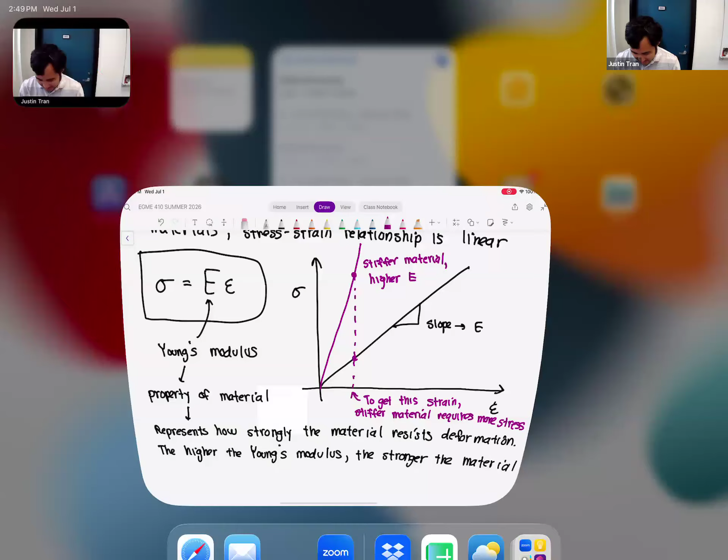I figure I'm not here just for an easy grade. I'm here to learn it, so I'm still going through it, not just copying screenshots and retyping them. No, I know, I know.

Kind of the unfortunate thing is that I teach all the FEA courses here, so there's a lot of overlap between them, mostly just because we don't enforce the prerequisites. Some people come in having taken 410, others haven't, some have taken 540 or 541, so it makes planning a kind of a nightmare.

But actually, this upcoming year, I think we're going to start offering 410 more often now. We're offering it this summer, and also in the fall and the spring. So I think we can actually start to enforce that prerequisite, and then I can do some more interesting stuff at the 500 level courses. But unfortunately, that would be next year, not this year.

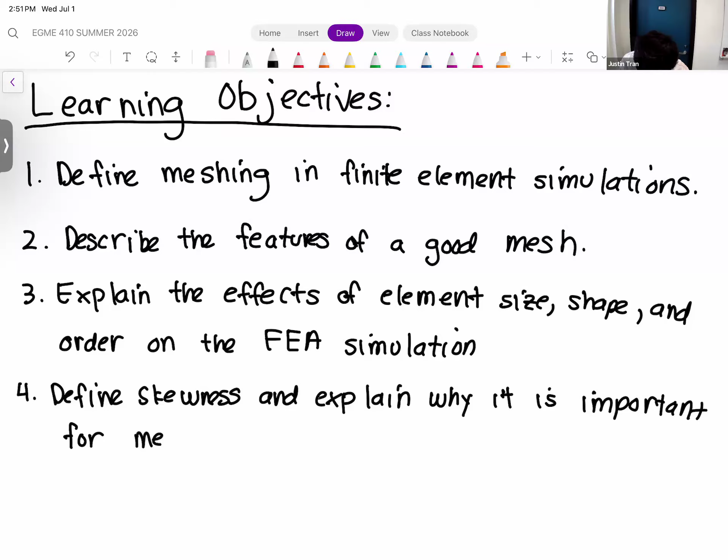Well, you know, I think if there's someone on staff who would know about viscoelastic materials, it would be Dr. Shinyi Wang, because her expertise is actually in materials. She had a student who just defended their thesis on the propagation of microfractures in materials. That's a different area of material science, but I would ask her, and I'd also ask Dr. Su, since they're both in materials.

Okay, yeah, thank you. Good to know.

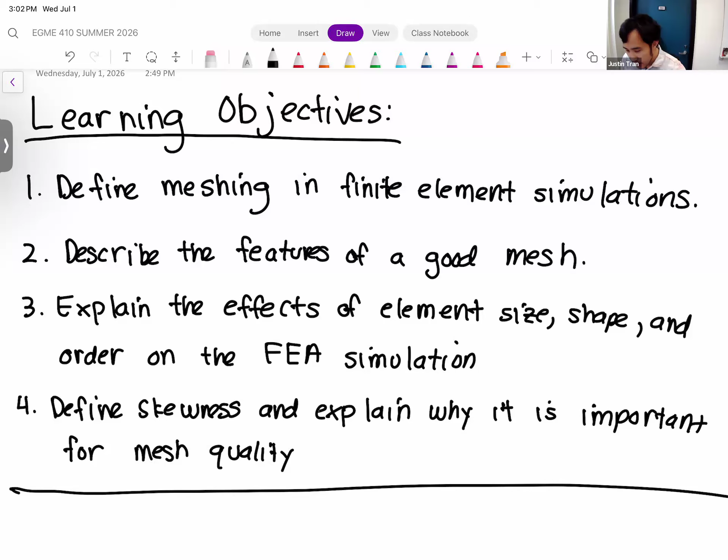Okay, let's go ahead and get started. Today's lecture is going to be about meshing, and we're going to go over what I call meshing basics.

Today is not going to be the first or last time we talk about meshing. Like I mentioned yesterday, meshing is probably the most unique portion of finite element analysis - probably the portion you haven't thought about in your previous classes. Tomorrow we're going to go over boundary conditions and material properties, which for the most part you've seen in different forms in your other classes. So meshing, I want to spend quite a bit of time on in this class.

Okay, so first let's define meshing one more time. When we say we want to mesh our geometry, we're basically looking to break up our geometry into a bunch of tiny, simpler shapes.

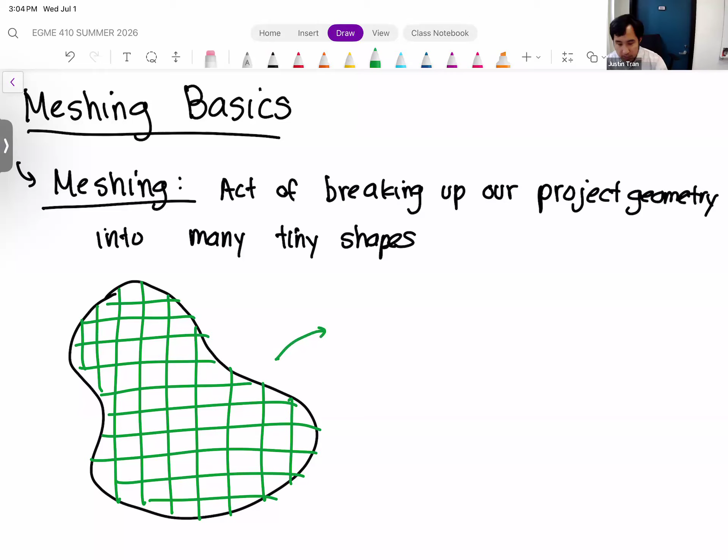What you're going to see, and you'll see this when we do our activity later, is that it literally looks like you take your geometry and superimpose some graph paper on top of it. So visually, you'll start with maybe a geometry that looks like this - this is your starting arbitrary geometry, it looks like a potato here. When you mesh it, we're going to take this and essentially put a grid on top, so it's going to look something like this. The whole idea is that instead of analyzing one complex geometry where it's very hard to solve our equations on...

...because that complex geometry can have any number of different sizes, any number of different curvatures, different edges, different surfaces. Instead, by meshing, we're solving our equation on lots of simpler geometries with a known shape - that's the key.

So one thing we're going to talk about today is that when you are creating your mesh, you have to make a decision in terms of what element shape you want to use. Your choices are not many, but they are consequential. For the activity today, we're going to do a two-dimensional simulation, so you can either choose a triangle or a rectangle, which doesn't sound too exciting, but it does make a difference. There are other features of the mesh that are going to make an impact on your simulation results as well.

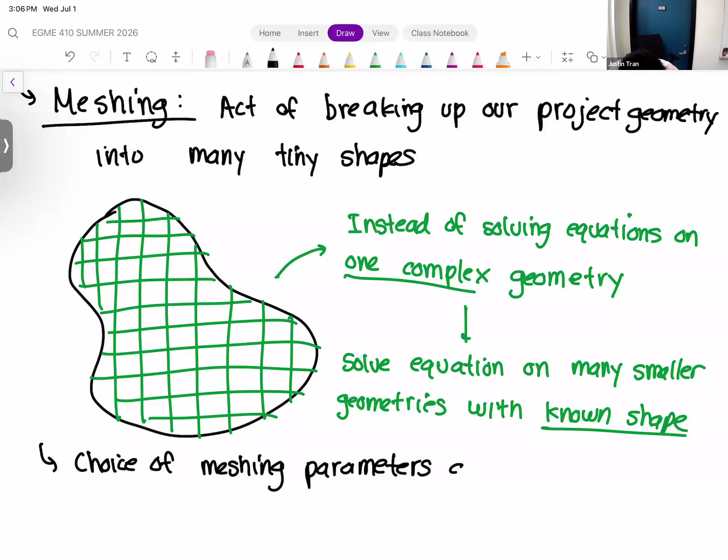So the mesh is one thing where if you're not careful, it can kind of get away from you a little bit, because if you're using ANSYS just as a new user, ANSYS provides a way for you to generate a simple mesh. So you can just use all the default settings within ANSYS and generate a mesh, and it will work. You'll be able to get a result from it, but more times than not, it's not going to be a result that's reliable. We'll talk about why that is throughout today.

The nice thing about these longer class sessions in the summer is that you'll actually see that applied right away. So we'll talk about the mesh first half today, and second half we'll do an activity and get to see the mesh in action, in terms of what the different settings actually do.

So the plan for the first half today is we're going to go over just the very basic meshing settings. We'll talk about what they do to the mesh, and then what they ultimately do to your simulation results at the end. Any questions on this so far?

Okay, good. So first, before we get into the really nitty gritty, let's talk about just what makes a good mesh in general.

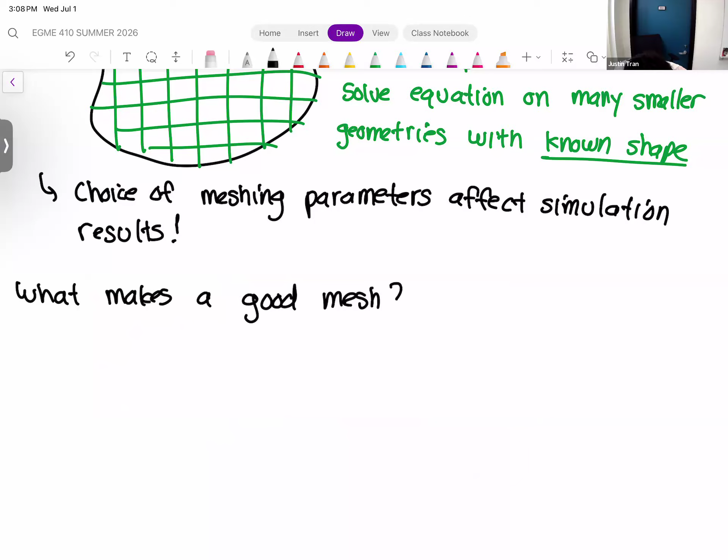Because you can certainly make a bad mesh in finite elements, and it's important—one important skill for you to know is to be able to identify what's a good mesh and a bad mesh. Let me just state it plainly first, and then we'll dive more into what this statement actually means. A good mesh is one that gets you an accurate and reliable solution in the least amount of cost.

So I've kind of underlined the two dominant factors that will go into your mesh, right? The first factor is accuracy, and the second factor is cost. And you're going to see that these two are often counterbalanced with each other. Usually if you want more accuracy, it's going to cost more. But if cost is a big concern, then you might have to sacrifice some accuracy as well.

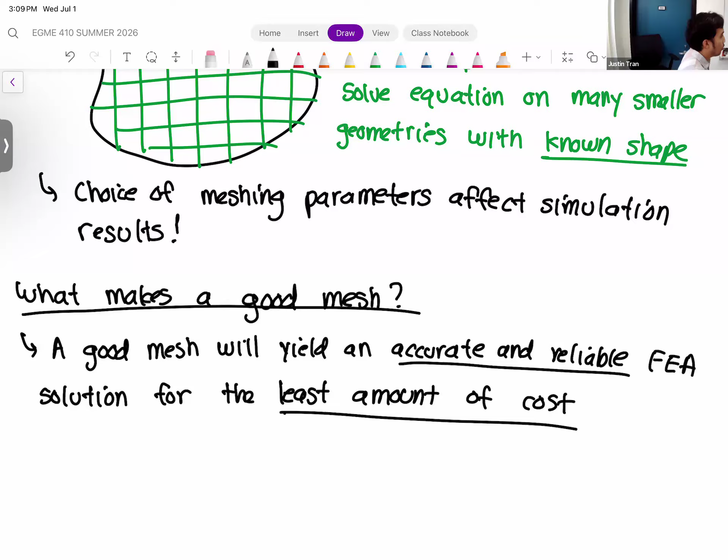There is some nuance, of course—you can change the size, you can change the shape of the elements, you can change the order of the elements. So there are ways to generate more accuracy without necessarily increasing the cost. But this is the main trade-off that you have to think about when you are creating your finite element mesh.

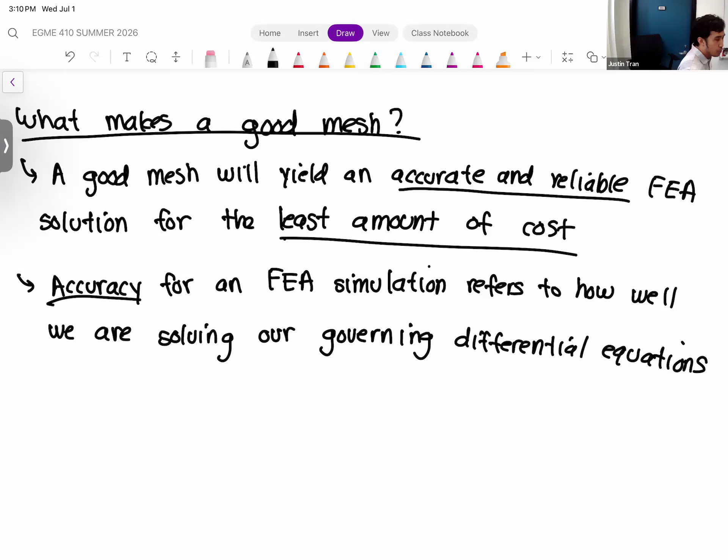Okay, so let's go through each of these one by one. Let's talk accuracy first. Accuracy refers to how well we are solving our governing differential equations. Remember we talked yesterday about FEA being just a method for solving these, oftentimes partial differential equations that govern our physical behavior. So accuracy refers to how well we are solving these.

So what do I mean by that? When we run an FEA simulation—one thing I neglected to mention yesterday, and I realized that right after the lecture ended, is that FEA doesn't necessarily find an exact solution to our governing equations. FEA is, at its core, an approximation technique.

We're not solving for exact solutions, and actually, depending on how we make the mesh, depends on how close we are going to be to that solution. The main factor for a mesh that determines accuracy is how many elements, or more specifically, the size of the elements in our mesh.

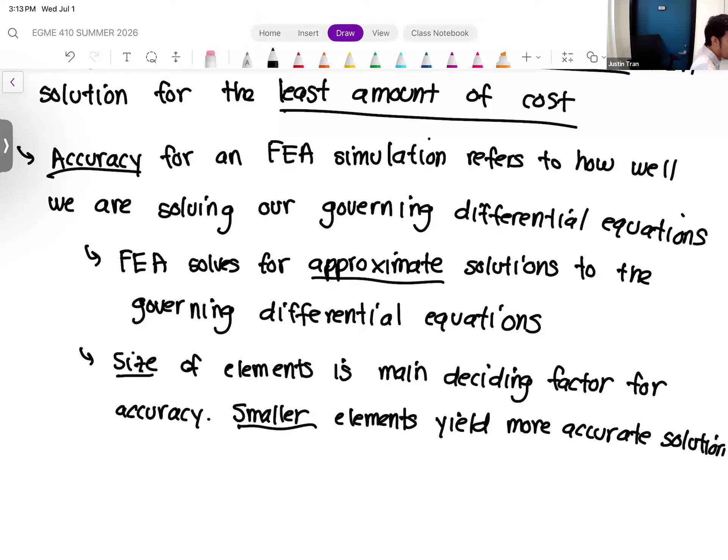So an analogy that I always like to bring up in this section is, think about how we understand image resolution. When you take a picture—it's a little bit harder to explain now because I feel like phones nowadays have such good cameras—but not too long ago, we would take pictures from our phone and they'd be a terrible resolution.

It was not too long ago where you could buy a TV that was only maybe 480p, right? Or maybe if you're on YouTube and the connection is not great and it has to buffer, maybe you reduce the quality to 480p. And so what that P basically represents is the number of pixels that are on your screen.

So if I were to draw this, let's say this is your screen right here. When you have a low resolution image, the size of the pixels on the screen are relatively big. And that's not actually 480 - I can't draw 480 pixels on a screen like this, but you can imagine that if each of those pixels that I drew were a single color, it's kind of hard, you're going to get a blurry image.

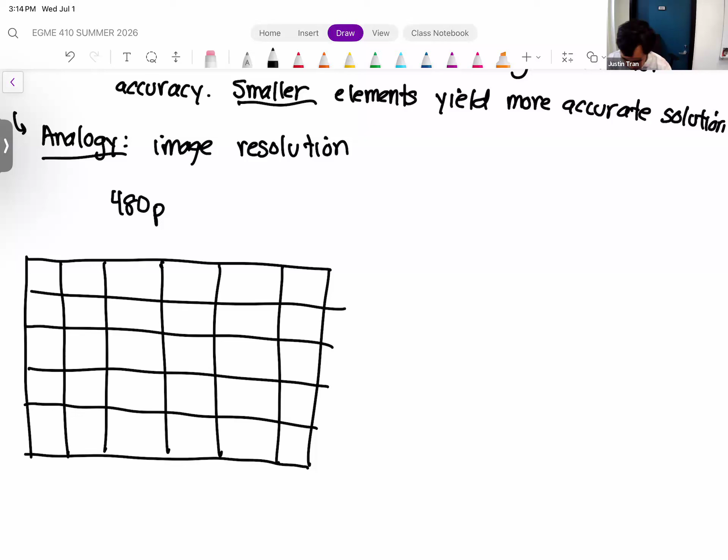Let's say this one is red, right? It's very hard to pick out a sharp image from this.

Whereas if you look at a higher resolution image - I would say the bare minimum nowadays is 1080p, but it wasn't that long ago where 1080p was actually a big revolution. Now you can go up to 4K, which is insane to me. If your screen or your image quality or video quality has a higher number of pixels, what that essentially means is that you have more pixels within your image to generate a sharper image. So I kind of regret doing this already, but you can imagine that all these pixels here are a lot smaller.

So you can imagine that for an image like that, if your pixels are much smaller, you end up with a much sharper, much clearer image. Usually that's one that's more appealing to watch.

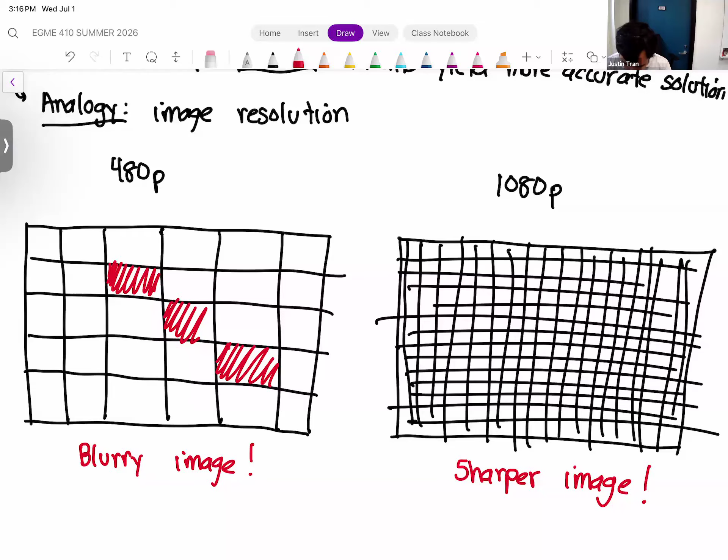So for finite elements it's the same, right? The smaller your elements are, and by association the more elements that you have in your simulation, the more accurate you can expect your solution to be. So let me give you a more direct example in terms of what FEA is doing. Let me show you a one-dimensional example here.

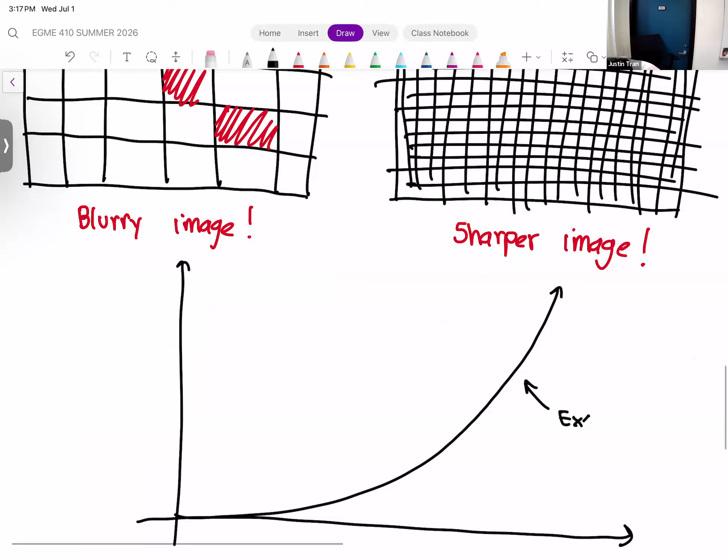So let's say that we have a function. Let's say that black line right there represents the exact solution to our problem. So let's say we just have a one-dimensional ordinary differential equation.

If we wanted to approximate this using finite elements, the accuracy of our solution will depend on how many elements we have. So just naively, let's create an approximation with just one element, and we're going to assume that our one element here has a linear approximation. So a one element approximation may look something like that, where on that one element we're only able to have a linear approximation, so it just goes from the start to the end. At the end points our solution may match, but in the middle of the element we start to deviate from the exact solution quite a bit.

But then our accuracy improves greatly when we go from one element to two. So let's say that we make a second element where our second element intersects the exact solution right there. So in orange there you can see we have a two-element solution, and you can see that we're getting much closer to the exact solution in that case.

And then we can even get even closer if we add another element. So let's say we do three elements, and so we have something like this where we're hugging the solution much more closely, just like that. So the smaller your elements are, the more elements that you have in the mesh, the greater you can expect the accuracy to be.

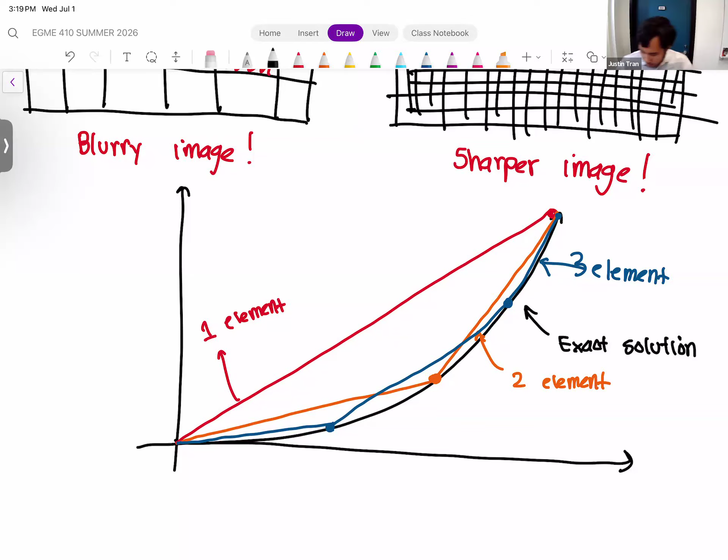So let's talk about cost, okay? So when we talk about cost for a finite element simulation, we're not necessarily talking about financial cost. Although eventually it does end up being financial cost, but as we experience it as users, cost refers to the amount of computational time and the amount of memory that it takes to run a finite element simulation.

It's primarily time, right? That's the main cost that we experience as users, just the amount of time it takes. But there's also computer memory, power, electricity, things like that as well.

Question? Yeah, so it makes sense that the more elements, the more kind of... we can approximate the curve. We're talking about the mesh, looking like the body and the surface. So when we're looking at a curve, that makes sense from the mathematical perspective, but what I'm trying to understand is, if you have a flat plate, the amount of elements you need on that compared to someone that has some sort of curvature might be less, right? I'm thinking intuitively.

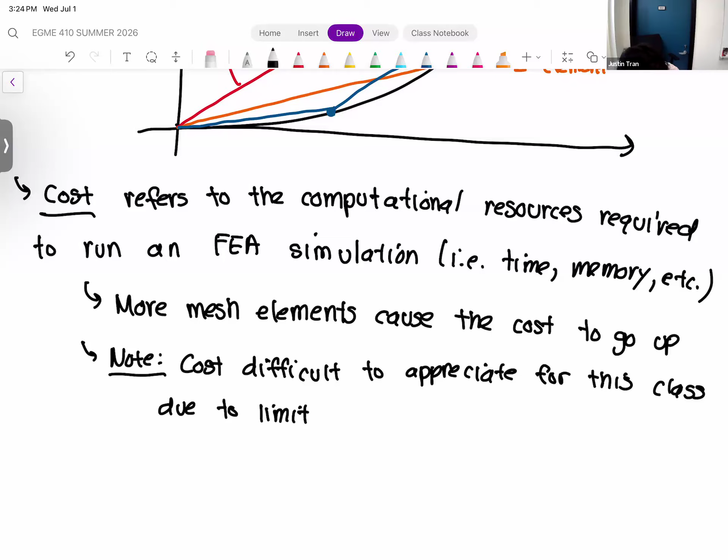What I mean by that is that the student version of ANSYS, if you install it on your own personal computer, actually places a hard limit in terms of the number of elements you can use for your simulation. For ANSYS Student, the one you downloaded from the website, I believe the limit is 64,000, although I haven't checked in a couple of years. Sometimes they raise it every now and then.

The licenses that we actually have on the lab computers in this room, and technically in the other room as well, we have a slightly better license. I don't know what the limit for that one is, but I know it's greater than 64,000 because I've seen it. I want to say it's around 100,000, but I've never actually pushed it to really find it.

So all that means is that you're never going to have a simulation that takes more than probably 5 minutes. 5 minutes is probably the maximum you'll experience in this class, because 64,000 honestly is not that much in the grand scheme of things. I'd say most practical applications for finite elements involve simulations with at least 500,000 elements, probably in the order of millions. But for everything we're going to do in this class, in terms of activities and projects, 64,000 is more than enough. I don't think you'll need more than 30 or 40,000 for most things in this class. But just be aware of that, okay?

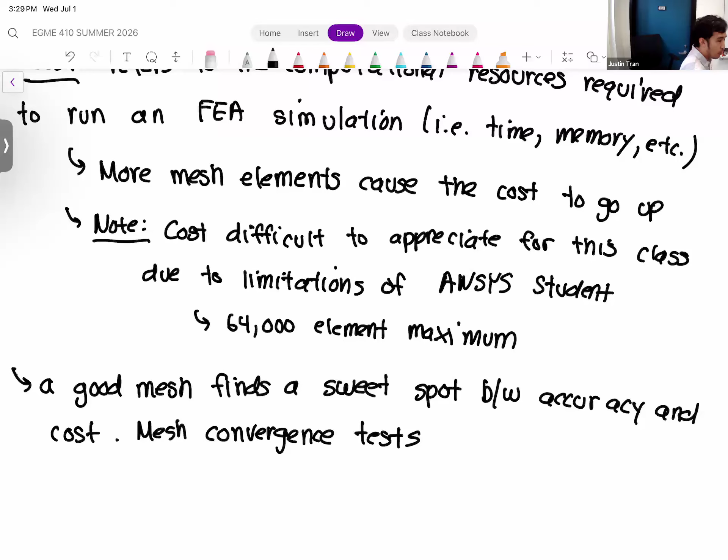Later on in the semester, once we start talking more about the projects, we're going to learn a technique called a mesh convergence test. A mesh convergence test is something you can do to basically show or determine whether your mesh gives an accurate enough solution.

We'll get to that in due time. For the first three ANSYS activities we're going to do in this class, we're going to introduce just the basics of ANSYS. But once we get to more advanced stuff, in order to prepare you guys for more professional reports on finite elements, this is something that, in my opinion, is a required aspect of any professional work - not just with finite elements, but any computational method, whether you're running CFD, finite volumes, finite elements, or finite difference.

There needs to be a mesh convergence test. Otherwise, there's no way we can trust your results.

Okay, so element size, even though that's certainly not the only important feature of a mesh, I would say it's probably the most important aspect of the mesh. Let's talk about some of the other aspects as well - let's talk about element shape.

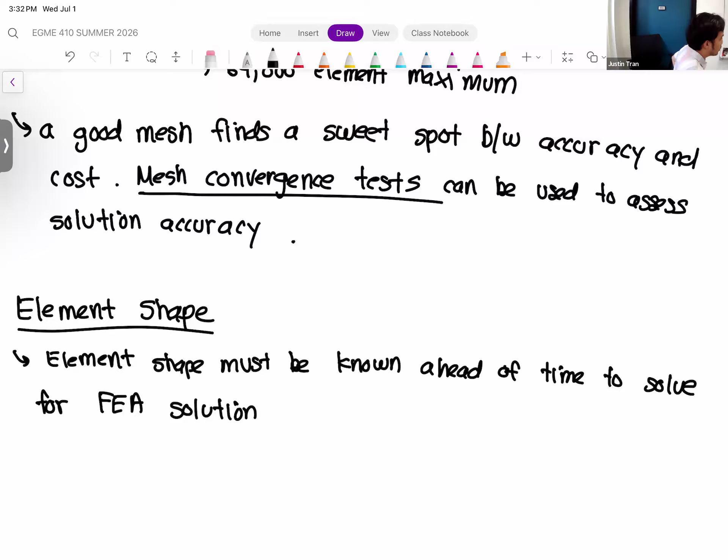For most practical situations, these are the only two options that ANSYS gives you. Not that these are the only two options ever in finite elements—if you use more advanced codes, there are more options. But the two that ANSYS gives you, I'd say, are going to be good for 99.9% of situations. So I break them down into two different categories: there are what I call triangular elements, with a 2D and a 3D version, and there are rectangular elements. We have a little bit of a table going on here.

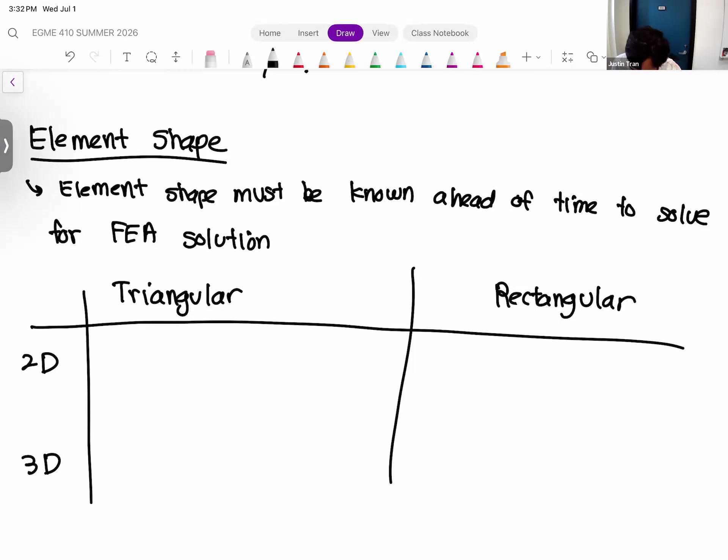The triangular elements share certain properties, both 2D and 3D—we essentially treat them the same way. Same thing for rectangular. So the distinction for you guys to know is the difference between triangular and rectangular elements.

In 2D, a triangular element is actually just a triangle itself—pretty simple, a triangle just has 3 vertices and 3 sides. In 3D, a triangular element is called a tetrahedron. Tetra stands for 4, so a tetrahedron is essentially a 4-sided pyramid. Those two edges in the back are connected, so it has 4 vertices and 4 sides to it. If you've ever played Dungeons and Dragons, a tetrahedron is just your standard D4 die.

For rectangular elements, a 2D rectangular shape is a rectangle—big surprise. But oftentimes when we talk about a 2D rectangular element, those are referred to as quadrilaterals. It's a bit more specific, because for a rectangular element to work, the two opposing sides don't have to be parallel to each other. The 3-dimensional rectangular element is called a hexahedron, which is just a fancy name for a box—your good old standard Amazon package. It's given the name hexahedron because hex stands for 6, so your hexahedron has 6 sides, 8 vertices, and 12 edges.

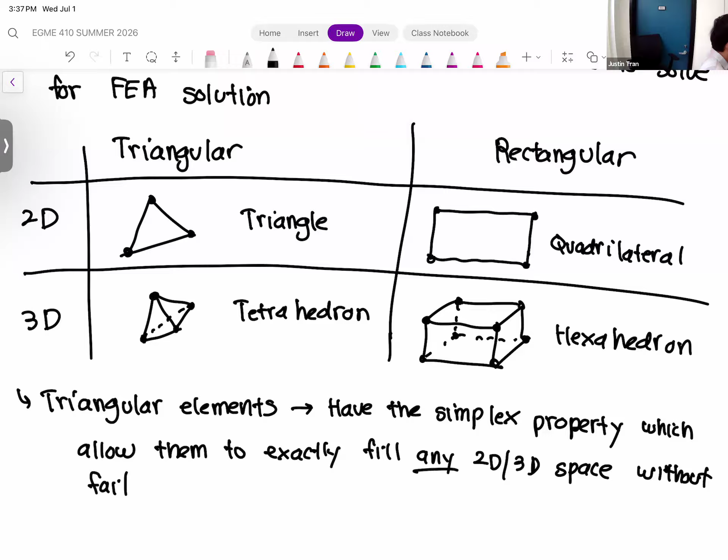Triangular elements have one very important and useful property called the simplex property. What that means is you can use triangular elements to mesh any geometry without fail. If you have a two-dimensional or three-dimensional space and you want to fill it with these elements, it's a lot easier to do so with triangular elements—you're much less likely to have your mesh fail if you choose triangular elements. So if you have a geometry that you know is going to be very complex with a lot of complex geometrical features, you may want to try meshing with triangles first, just because you're more likely to get a mesh in that situation.

The reason triangular elements have this simplex property is that a triangle isn't really a symmetric-looking shape. If you look at it from this perspective and draw a line like this, the top half of the triangle is skinny while the bottom half is wider because it has more vertices—and that actually helps a lot. So if you ever have any weird corners or weird spaces within your space, it's much easier to fit a triangle into those spaces than a rectangle. Now the downside to triangular elements is that, because they do have that lopsided shape, they're not particularly great at filling space efficiently.

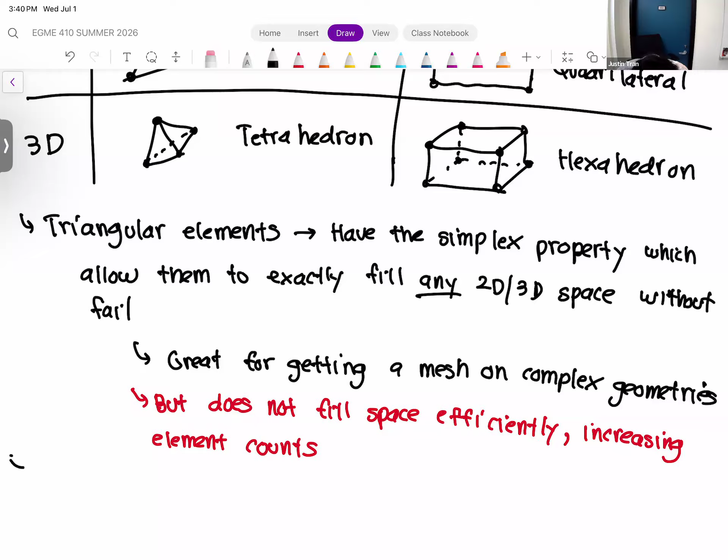Okay, let's talk about that. So rectangular elements have much better space filling properties, so they can fill space a lot more efficiently. And filling space more efficiently means that you get lower element counts as well.

Oh, question from the chat. So the question says, could you mesh with both rectangular and triangular elements to analyze a part? Yeah, you can. So one thing we're going to talk about right before we do the activity is you can do mixed meshing. Sometimes, for a particularly complex geometry, you can mesh one portion of your geometry using triangular elements and another portion using rectangular elements.

And that actually goes for other aspects of the mesh as well. So you can actually do a more refined mesh in certain areas and a more coarse mesh in other areas. You're definitely not limited to a certain setting for an entire geometry. A lot of times it does actually pay to mesh with different settings in different places.

Yeah, for sure. Usually you don't want to mix too much. Like you don't want to have just an area that has both triangles and rectangles all mixed together. Usually you want to limit it to a particular region.

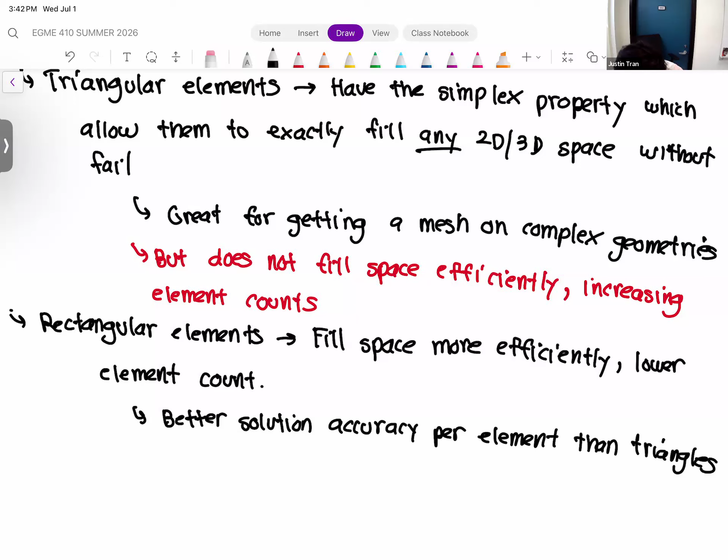We'll go a bit more into that, I think, probably after activity 2, so probably middle of next week. What I mean by that statement is that you'll see the shape function for rectangular elements has more terms in it, which gives us better properties.

Okay, now the downside to rectangular elements is that they're not as flexible as triangles, and so you're going to run into more meshing errors with your rectangular elements. You're going to receive a lot more errors when you do a rectangular mesh.

And because of that, rectangular elements are best used for situations where your geometry is a little bit simpler, just because in those situations it's easier to get rectangular elements into there.

Not that it's impossible to get rectangular elements to work for a complex geometry. You do have to kind of fiddle with it quite a bit. I think probably by the end of the class, you guys will have enough experience to know how to finagle with the settings to refine the mesh in certain areas.

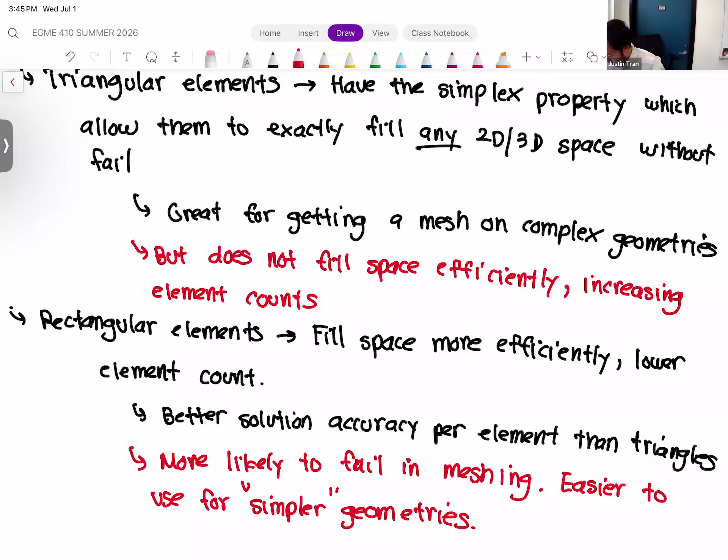Okay, and so while we're on the topic of shape, let's talk about skewness very quickly. Skewness refers to one way to describe how ideal your elements look in your mesh. Or I guess a more accurate way to say it is that skewness describes how much we deviate from the ideal shape of the elements in our mesh.

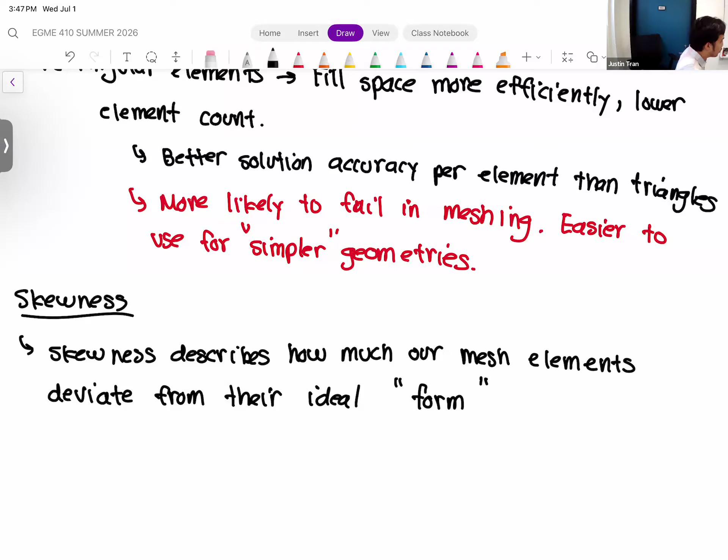So every element, whether we have a triangle element or a rectangular element, has an ideal form in which it performs best. And that form is as close to equilateral as possible. So you want a form where all the sides of your element have the same size, all the interior angles have the same value, and so on. For example, if we have a triangle, the most ideal form is for it to look something like this. It's not perfect, I didn't pull the ruler out, but you want all the sides to be approximately the same.

But what can happen sometimes, and some of this is unavoidable, is that as your mesh tries to fit into small corners and awkward areas of your geometry, you may get elements that become very skewed. For example, you may get a triangle that looks very squished. Some of this is unavoidable, and it's impossible to get perfect elements everywhere unless you're literally simulating a triangle or a square. So if your geometry has any complexity, there's going to be some elements that look like this. But generally, the more elements that look more skewed will lead to a poor quality solution.

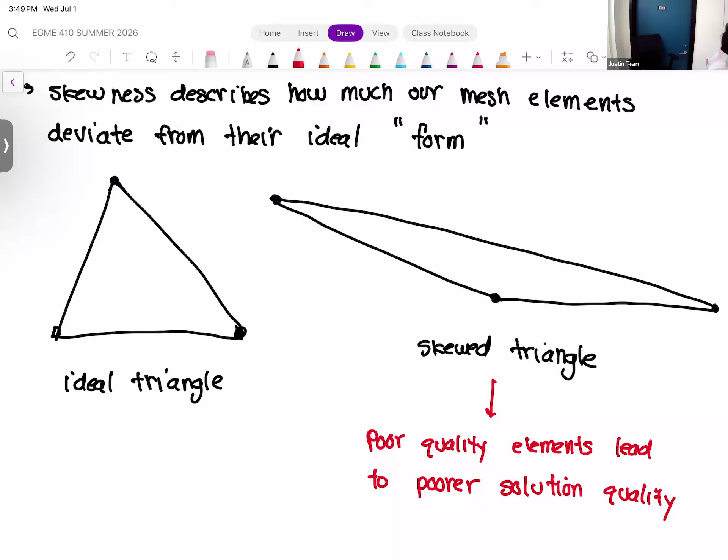And in fact, this is the term that ANSYS uses - we refer to this as the mesh quality.

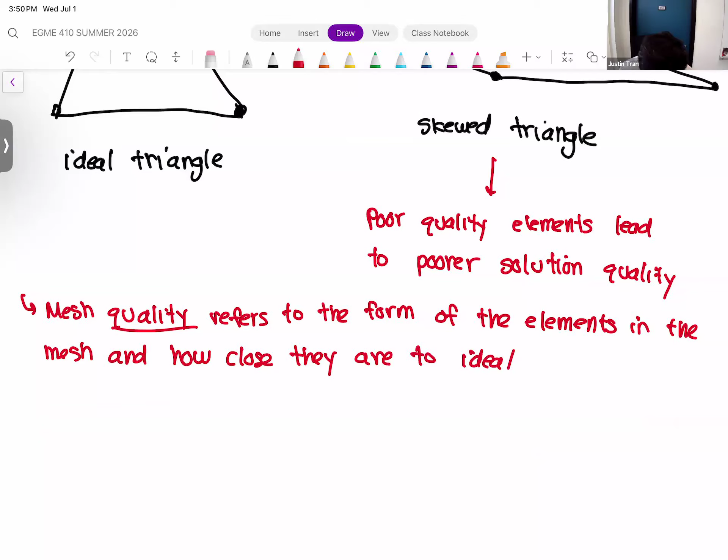Quality is something you could actually check within ANSYS itself to see how the quality is. Now, the meshing algorithm used within ANSYS is actually very good. It's proprietary, so that's not something they share with people. I've had grad students create a mesh within ANSYS but then export it to another solver with more features I like, just because of how good the mesher is within ANSYS - that's how good it is. So for the most part, ANSYS will give you a good quality mesh, granted that your selections for size and shape are good choices. But even with that, it's inevitable that you're going to get some elements that are poor quality. That's just how meshing is.

So there's always going to be some. For activity 2, we'll actually start to look at the mesh quality metrics within ANSYS. You're always going to have some poor quality elements, but don't panic - that's just how meshing is. It's not necessarily the fact that you have poor quality elements, it's more the amount of poor quality elements that you have.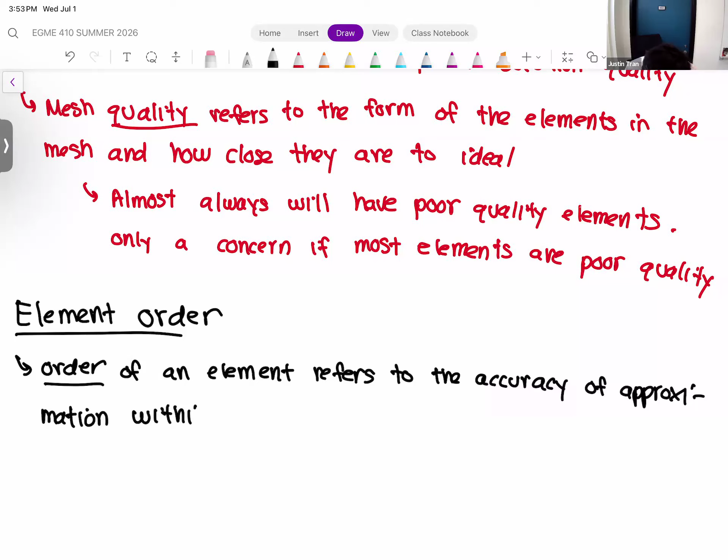So overall, we have a sense of accuracy in terms of how our overall solution matches with our governing equations, and that is determined mostly by the size and the shape. The element order really governs how accurate we are on a per element basis.

I know that statement is a little bit vague, so let me give it more detail. For element order, we have two different options within ANSYS: we can either have a linear element or a quadratic element. These might seem like strange terms when you think of finite elements, but once you understand what they refer to, it makes sense.

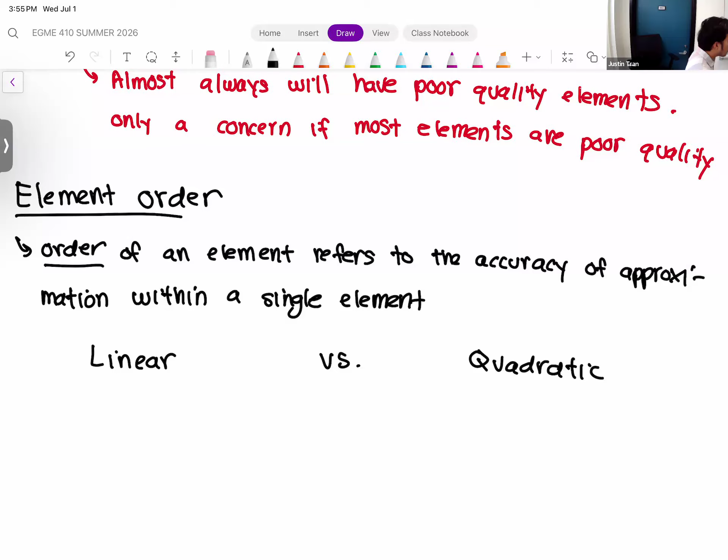For a linear element, what the FEA technique is assuming is that within our element, our solution varies according to a linear polynomial. I'm going to write down a one-dimensional linear polynomial, but know that we're applying this in multiple dimensions as well. A one-dimensional linear polynomial, as generic as it comes, looks something like this. Linear refers to the exponent of the unknown variable x, and a linear polynomial has an exponent of 1.

So that means for a quadratic function or quadratic element, the variation within the element is assumed to be a quadratic polynomial. A generic one-dimensional quadratic polynomial looks something like this. The main difference between these two is that the quadratic polynomial has that extra x squared term that the linear polynomial does not. This is kind of the main difference.

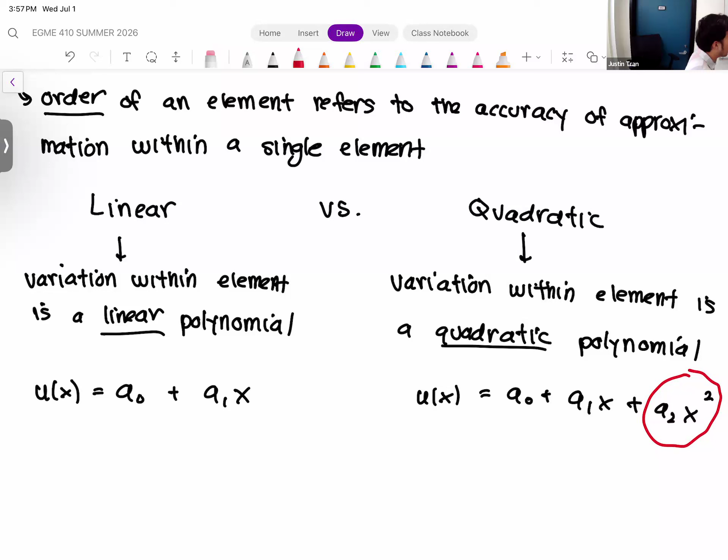That extra x squared term is not free, so it does take a little bit of extra cost to compute. The choice of whether you use a linear or quadratic element is similar to our discussion of element size - it depends on how much accuracy you want versus cost. The linear element is generally cheaper, but it leads to a less accurate solution on a per element basis. Whereas quadratic elements are technically more expensive to compute, just because there are more terms for it to compute, but you do get better accuracy. So that's generally the trade-off.

For most of our cases here - and this is probably the only section of this class where I'll say this - because ANSYS makes it so easy to select quadratic elements, and the benefits are so great, 9 times out of 10 you're going to pick quadratic elements for your simulations.

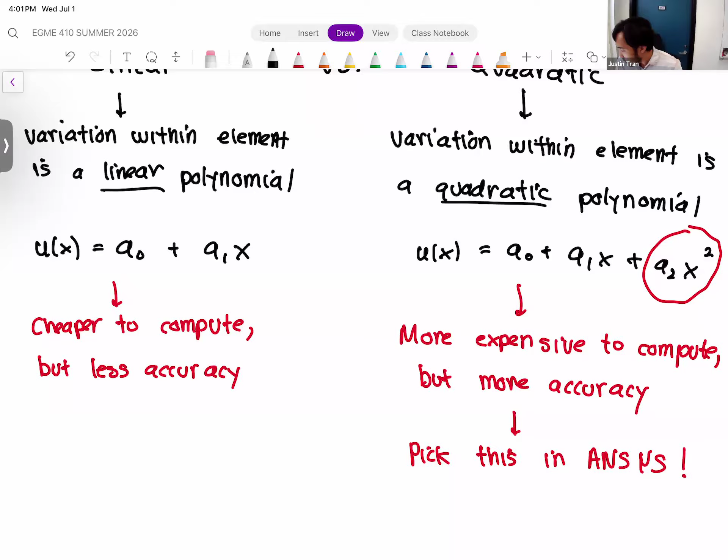All right, so one last topic before we'll take a break is this aspect of mixed meshing. I know a few people have already asked about it, but let's go ahead and talk about it formally here.

We've talked about all of these features within meshing, and this, of course, is not everything at all - this is just the absolute basics in order to get started. But even with just the basics, you can see there's a lot of degrees of freedom, a lot of decisions you have to make in terms of how you want your mesh: choosing the size of the element, choosing the shape, choosing the order. So just like a few people have asked already, a lot of times it's beneficial to use different mesh settings within different regions of your overall geometry.

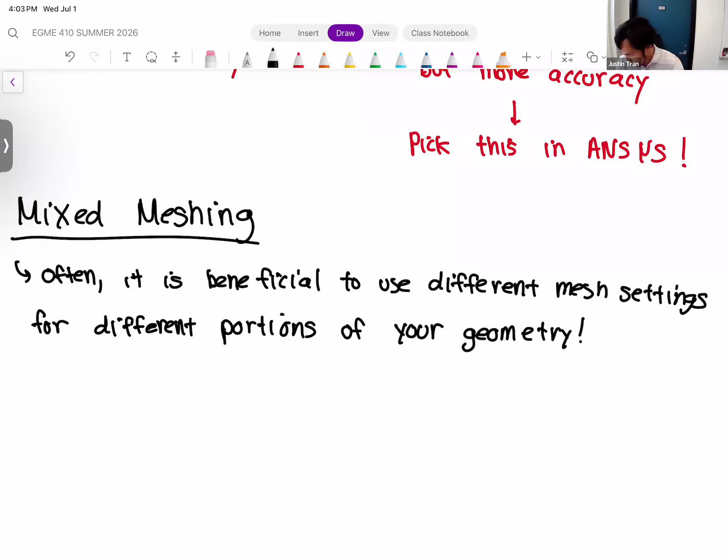Because remember the overall goal for a mesh: we're trying to get the most accurate solution for the least amount of cost. For more complex situations, there are going to be regions in your geometry that have more complex solution characteristics versus others. So if you really want to make good use of your resources, your mesh elements, you want to give the most attention or mesh density to those regions. Whereas you can take elements away from other regions where the solution may not be that exciting. Let me give you an example.

You'll actually see this in about 30 minutes when we do our activity. For our plate with the hole, activity 1, we have our rectangular plate like this, with our hole in the middle. What you're going to see when you run the simulation is that within the regions around the hole, particularly these regions here, the von Mises stress, or mechanical stress, in those regions is going to be much higher compared to other regions within the plate.

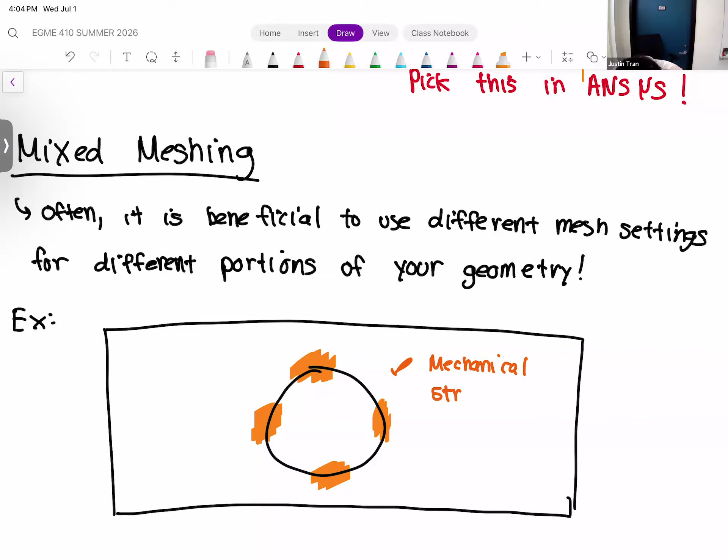So usually areas of stress concentration are areas where you want to have the most accuracy as possible, because those are going to be areas where generally you expect your part to fail, since that's just where the stress is concentrating. So you want to make sure you get the answer there correct. Those are excellent candidates to add what's called mesh refinement, where we make smaller and smaller elements in those regions in order to get the accuracy just right.

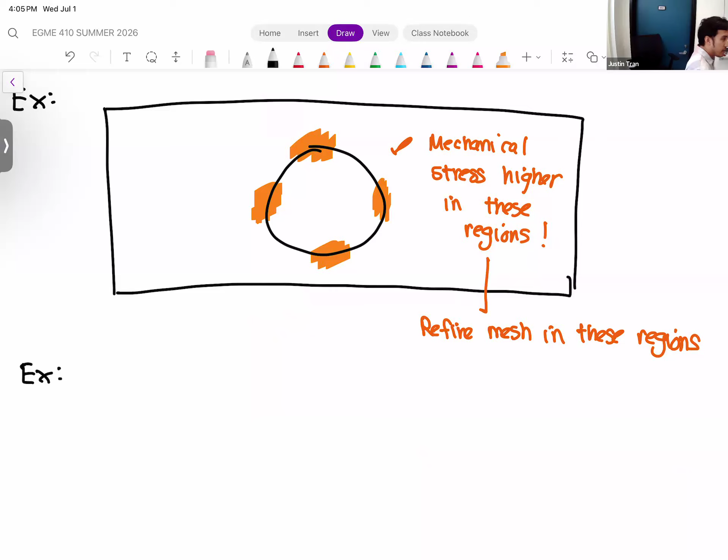And the opposite is true as well. Let's say you are simulating a geometry, but there's going to be a large portion of your geometry where not a lot is going to happen. So we'll give you a preview of activity 3 - ANSYS activity 3, which we'll do at the end of next week. We're going to be simulating a freeway signpost.

So we have a signpost that looks something like this - it's a very poor drawing of one, but you can kind of see. Once again, when you do the simulation, you're going to see there's a particular region where stress is going to concentrate, which is the region supporting the entire weight of the signpost, down here. Whereas if you look at the other regions of your signpost, particularly the sign, the rectangular part, there's not really going to be much stress up there, because that part is really only supporting its own weight, which is not much compared to at the bottom.

So that might be a good candidate to say let's coarsen the mesh in this region, just because our solution's not really doing anything interesting in that area. And then let's take the elements that we save in that region and pack them into the region of stress concentration, which is down here.

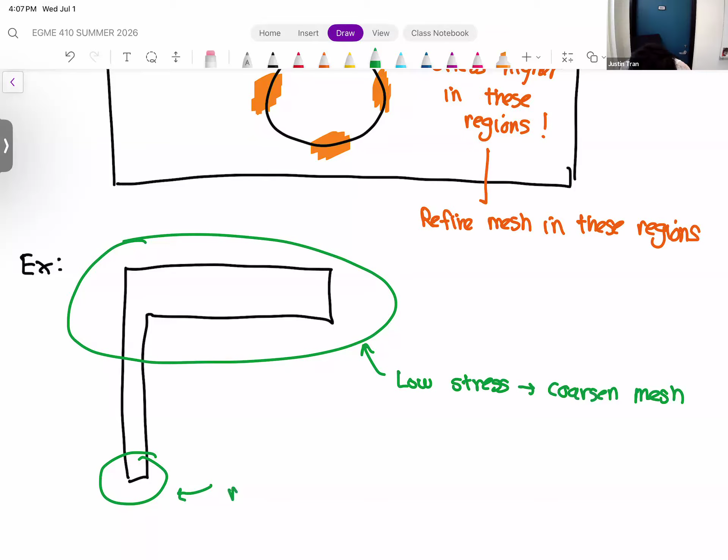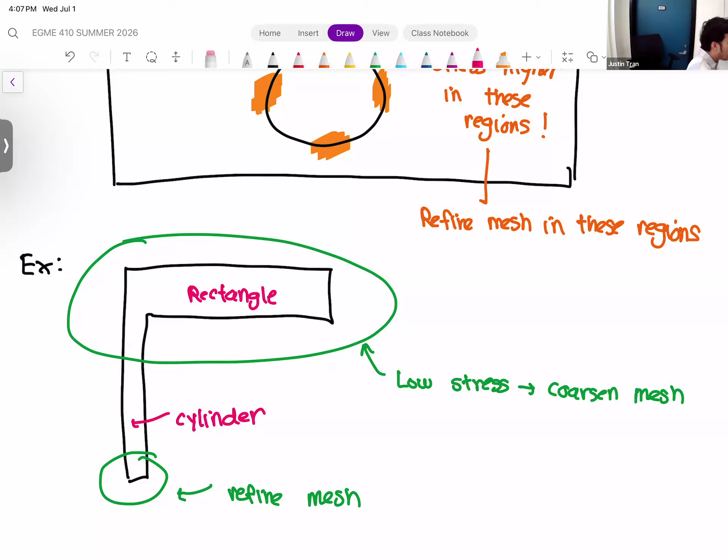Another aspect you may look at is the fact that our sign here is a very rectangular geometry - the sign is literally just a rectangle. Whereas our post, the column supporting this, is a cylinder. Now a cylinder isn't exactly what I'd call a complex geometry - you could easily mesh it with rectangular elements, but the curvature may give you pause at first, thinking maybe it'll be easier to mesh this with triangular elements. Whereas the rectangular signpost, that's as rectangular as it gets, just because it's a giant rectangle, will probably be very easy for us to mesh with hexahedrons or rectangular elements.

Mixed meshing is very common. ANSYS actually makes it very easy to apply different mesh settings in different regions, and that's something you'll make use of quite a bit. Maybe not for the first couple of activities, but as we start to do more complex things, as you do your own projects, the midterm project, final project, this is definitely something you're going to want to use in order to get the most out of your simulation.

All right, any questions on this?

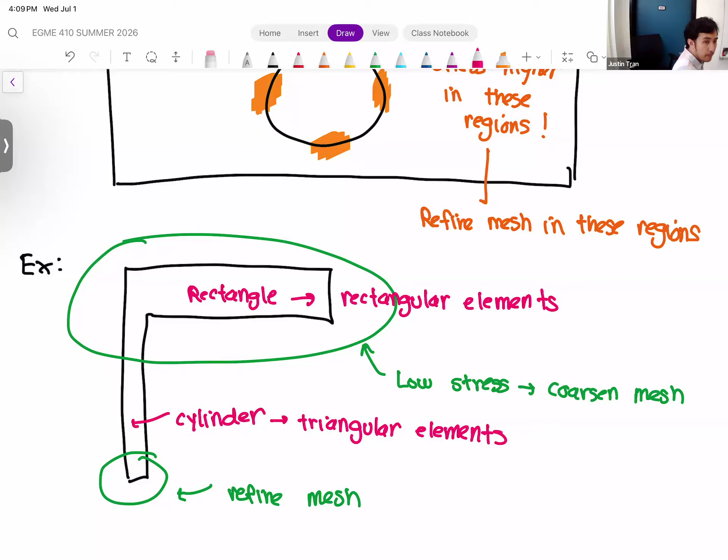Yes, not exactly on this, but I'm trying to understand the difference between mesh quality and element order. I get that with mesh quality, it's telling you how much deviation you're getting from that ideal triangle shape, but I don't understand how element order is different. I get that there's linear, but what exactly does it mean? I'm trying to picture it.

Element order refers to how the solution is approximated within the element itself. So element order has nothing to do with shape, whereas mesh quality is only based on the geometry of the element. Mesh quality is how the shape is formed geometrically, but order is how the solution is approximated. So they're kind of completely separate.

Does element order take quality into account, or is it not related? They're completely separate. You can have poor quality elements with a quadratic order, but mesh quality doesn't have a direct impact on the solution. Mesh quality is just the shape of the element.

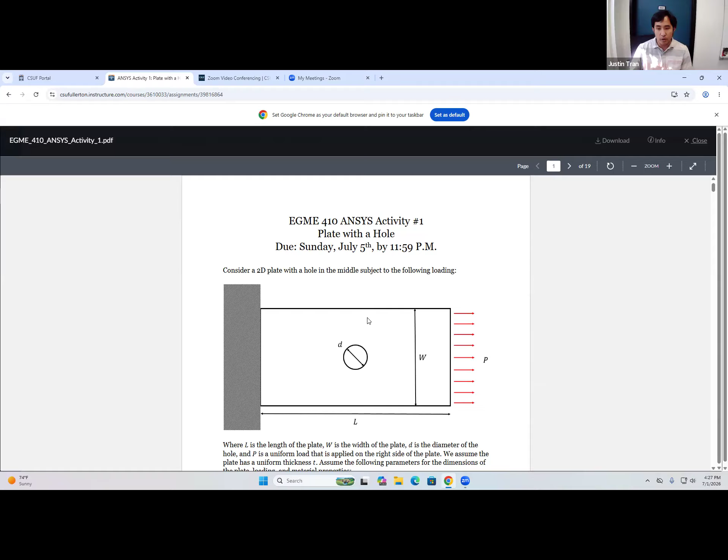Let's go ahead and launch ANSYS, which is not as straightforward as you would think. If you've installed ANSYS on your personal computers, or if you're working on computers here in the lab, to launch ANSYS we actually need to launch a program called Workbench. So if you open up your start menu and search for Workbench, okay. If you're using the version in the lab, it should be 2025 R2, which is the revised version of 2025 ANSYS.

I think I saw yesterday, if you downloaded the version on your home computers, it should be 2026 R1. It doesn't really matter, we're mostly just going to be using the basic features in ANSYS, so there's not that much difference between the two. You may have some issues if you're trying to work in between the two. You can upscale your ANSYS files from an older version to a new version, but you can't go the other way. So if you start a project on your own personal computer, it's actually very difficult to import that back into an older version of ANSYS. Just be aware of that.

Okay, alright, so let's open up Workbench. It does take some time, ANSYS is not a light program at all, which is one of the criticisms it gets. But if you're used to SolidWorks, it's definitely about the same heaviness as SolidWorks, and so it does take a while to load.

Okay, while that's going, I'm going to talk through the rest of the setup here. Like we talked about yesterday, when you're running a finite element simulation, you're primarily concerned with the problem set. So we're going to set up the problem, set the mesh, the boundary conditions, the material properties, and then let ANSYS solve it for us.

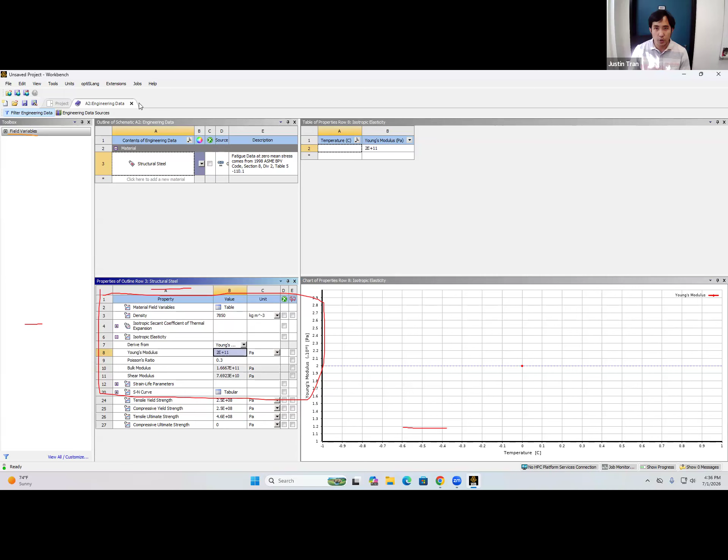Let's go ahead and close it — click the X here on this tab at the top for A2 engineering data. That's going to take us back to our workbench.

The next step is to define our geometry. But before that, we need to do one special step just for this activity, because this is the only activity in this class that's going to be in two dimensions — every other activity will be in three dimensions. To specify that our simulation is in 2D, right-click on geometry, then click on properties. That lets you edit the properties of the geometry before we start defining it.

After you open up the properties, go to line 19, where we define the analysis type. By default, the analysis type is 3 dimensions, since for the most part finite elements is a 3-dimensional technique. But only for this activity, we need to change this to 2 dimensions. Make sure you change it to 2D — if you don't, it's going to cause some issues later.

Not that it's that big an issue. This activity is actually very short. It's going to seem very long just because I'm talking through everything, but if you start it from scratch, it actually only takes about 5 minutes. So if you forget to do this, or you get later on and it's still 3D, you just need to make sure you change it there. But for now, let's go ahead and change this to 2 dimensions.

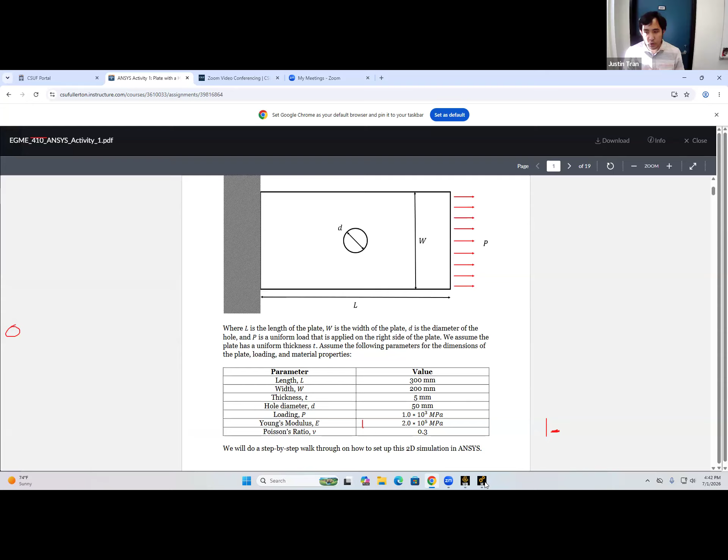So first thing we're going to do is change the unit system so that it makes it a little bit easier for us to draw.

To change the unit system, go to the top left of the screen. There is an option here for units, so go ahead and click on that. You can change the unit system to any of your SI units or English units here as well.

For us, let's go ahead and change it to millimeter. Make sure you are on millimeter here. Once you do that, you can see in the bottom of the screen our ruler has changed as well—instead of being measured in meters, we're now in millimeters, which is going to be more convenient when we start to add dimensions to our geometry.

All right, so let's go ahead and draw a rectangle. Let's go ahead and left click on rectangle here. That's going to activate a pencil on the main screen.

To draw a rectangle, it's basically a two-point drawing. You're going to click once to establish one corner of the rectangle, and then click and drag to define the other point of the rectangle.

Don't worry about the length, we are going to dimension that in a second. The only thing you need to make sure is that you just define the overall shape of the rectangle. Is everyone able to get the rectangle drawn in the plane here?

Okay, good. So let's add dimensions. Let's go ahead and set the length and width of this rectangle.

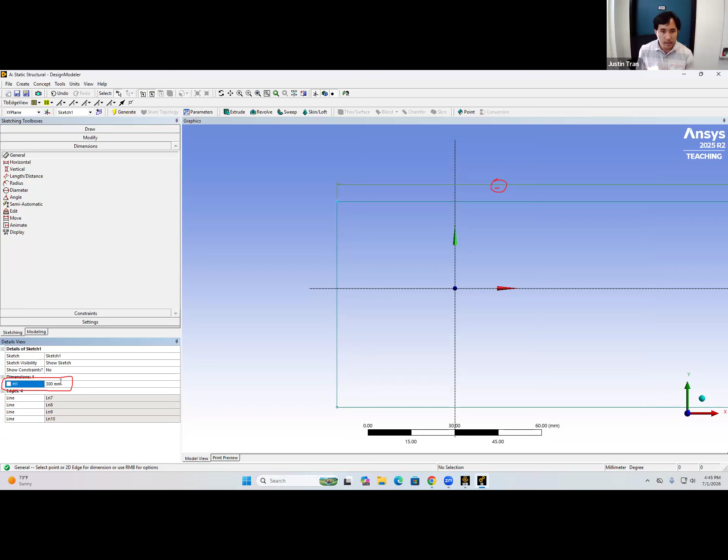Okay, let's go ahead and set this value to match our specifications. The length of our plate was 300 millimeters, so let's set that length H1 to 300. Just click it, type 300, hit enter. You can see that makes the length of that rectangle much larger.

Let's do the same thing, but now establish a dimension for the width. Click on the vertical edge of the rectangle, click it out, then come back to the bottom left-hand side of the screen and set the value for that width, which we know from our specifications is 200 millimeters. You can scroll on the mouse wheel to zoom out as well.

Okay, so now we have our rectangle here. And we need to move it.

By the way, if you want to pan - probably you're having this issue where you're zoomed in like this and can't see the whole rectangle. You can scroll on your mouse wheel to zoom out, but if you want to pan or move the entire thing, you need to hold Control on your keyboard and then hold the middle click, the mouse wheel. Then you can move the image around. This mouse is a little scuffed, so I can't move it all too much. But that's how you move it around.

Okay, so now that our rectangle has the proper dimensions, the next thing we're going to do is center it, because eventually we're going to put a hole in the center of this rectangle. That'll be a little easier to do if the center of the rectangle is aligned with the origin.

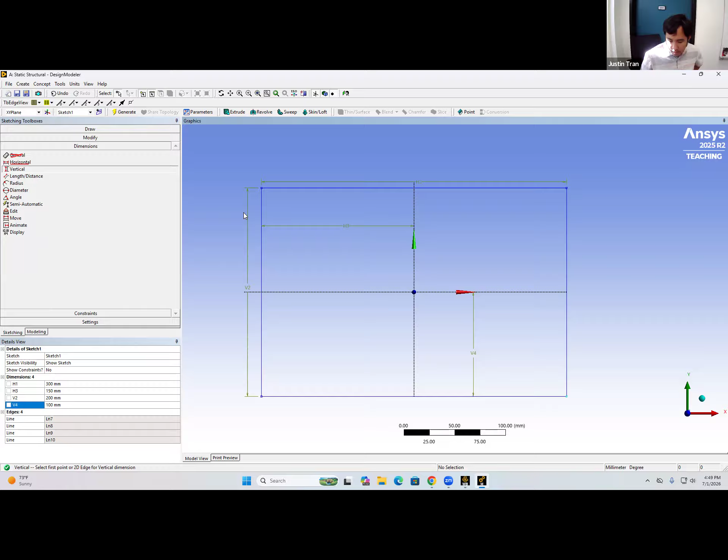Yes - where did you say the dimensions were for the vertical and horizontal? Yeah, so we want them to be half of the length and half of the width. The horizontal distance between this edge and the y-axis is going to be 150, and the vertical distance between the x-axis and the bottom of the rectangle is going to be 100.

Okay, good. All right, next thing we're going to do is draw our hole. Our hole is just going to be a simple circular hole right at the origin. Let's go ahead and click draw, and return to the sketching menu. Click on draw, and then click on circle.

Okay, go ahead and click on circle, come to the origin here, left click on that. Now we can click and drag out to specify the size of the circle. It doesn't really matter how big you make it since we're going to dimension it in a second anyway. Go ahead and click and drag. I'm just going to make it this big here. Right, so now we've drawn our hole.

The next thing we need to do is dimension it. Just like we did with the rectangle, we're going to left click on dimensions here. We can click general dimension since the diameter of the circle is a general dimension. Click anywhere on the edge of the circle. It's going to allow us to establish this diameter here, D5. And then we're going to set D5 to be the diameter, which is 50 millimeters.

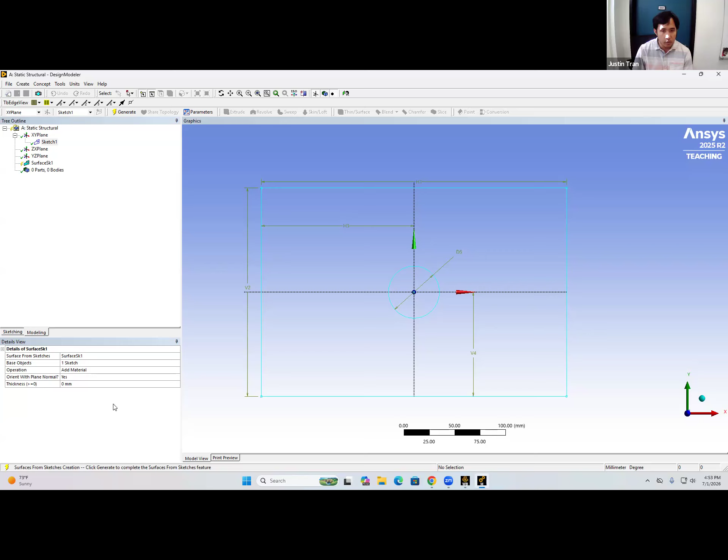All right, so we can go ahead and do that, and then we need to set the thickness, which is basically the amount that we're extruding out into the z-axis. If we return back to our project specifications here, we can see that the thickness is 5 millimeters. So let's go ahead and specify that — we want a thickness of just 5 millimeters here.

All right, so with that all settled there, in order to generate our surface, we need to hit this lightning bolt option up here for generate. Make sure that everything is good — your sketch is all dimensioned properly, your surface sketch is set properly with the right thickness and referring to the right sketch. Okay, so go ahead and click generate.

And if all goes well, you should have your geometry that looks just like this. So you should have a solid plate here, and there should be a hole where the hole is meant to be. All right, everyone able to get this in their design modeler so far?

Okay, good, all right, great. So that's good, so now our geometry is established. And so now we are ready to mesh the geometry here.

So the meshing is actually taken care of in another program. One annoying thing with ANSYS is that sometimes you have to close programs and open different ones in order to continue, so you want to be careful here. We want to close out of Design Modeler, but we don't want to close Workbench, right? Workbench, remember, is our manager software. The only thing we want to close here is the Design Modeler, so go ahead and close that. Don't worry, it's saved automatically.

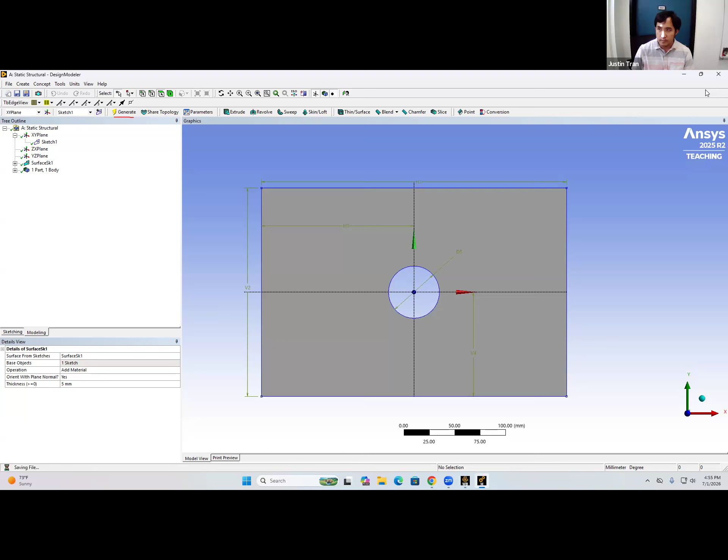If you close Design Modeler, you should be able to return back to Workbench. But one thing you should notice is that our geometry now should have this green check mark. That's telling you the geometry is set properly within ANSYS, and we're now ready to move on to the next step.

So the next step is to open up another program called ANSYS Mechanical. In order to do that, we're going to double click on the Step 4 model here. This is going to open up ANSYS Mechanical, where we're going to run the rest of the analysis for today. Mechanical is the program we're going to spend the most time in, because that's where we apply the boundary conditions, the mesh, and view the simulations.

Because of that, Mechanical is a bit of a heavy program, so I'm going to let it run. I'll take 5 minutes now to walk around briefly. If you want to continue, the next step is the meshing, and if you're following along in the PDF, that's page 9. But I do want to walk around a bit to make sure everyone has set the geometry appropriately.

If you're launching Mechanical for the first time, you can choose the theming. All my friends think I'm a psycho because I prefer light mode, but if you want to save your eyeballs you can pick dark mode. I actually prefer the light, or you can go with the classic, which is kind of what I've always known. But you can choose whatever you most prefer, it doesn't really matter.

To 5 millimeters for thickness. You said it there, so you want to change your units here, the units go here. Yeah, so you probably want to do it back in the sketch, so go ahead and delete this for now. I'll click on sketch, go back and let's make sure your sketch is in the right units. Go ahead and click on the sketch there. Right now it's waiting for...

That's good. Are you guys doing good? It's good, nice. Okay, yeah, your mesh looks good, you can zoom in on your part. Yeah, okay, zoom all the way.

When I first made it, the first dimension was really small. Yeah, so you want to go back to the circle, go to the origin, there you go. And then you can dimension that to be 50. Good.

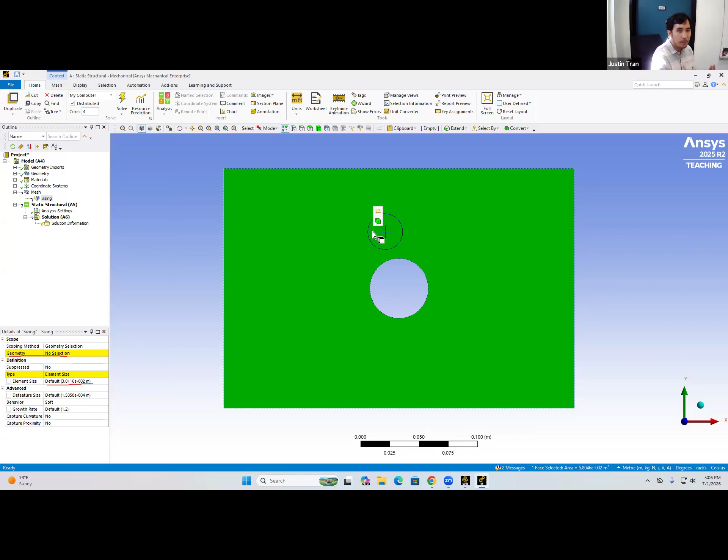So first let's specify the geometry. For this, there's only one aspect of the geometry, which is just our plate, so there's not much to choose here. Go ahead and left click on the plate. You're going to see the entire plate highlight green. You're going to go to geometry here where it says no selection, left click on no selection, and then hit apply. Now you'll see the geometry is applied to one face, which is our plate.

Now we need to specify the element size. Let's do this as well, just to make this a little less obnoxious. Right now, the default units for ANSYS mechanical are in meters. You can keep that if you want, but if you want to make things more convenient, you can click on home on the top of the screen, then go to the middle of the screen where there's a button for the units.

Just like we did in Design Modeler, we can change the units. Let's go ahead and change the units to millimeter, kilogram, Newton, second. That makes it a bit easier for us to specify our mesh size.

We can see our mesh size default is 30 millimeters, which is pretty big for this plate. Let's go ahead and make this smaller, starting by cutting it in half. Let's make our mesh size 15 millimeters.

Let's regenerate our mesh. To regenerate it, right click on mesh just like we did the first time, and click generate. It should be pretty fast since this is a simple geometry.

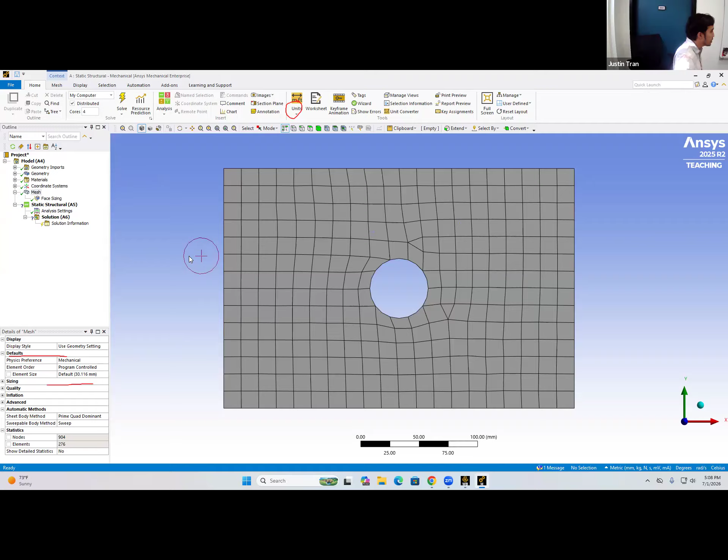You can see we have a vast improvement for our mesh already. Our elements are much higher quality—everything is much closer to its ideal quadrilateral or equilateral shape. We still have a few triangles, which is not uncommon, but overall this is a much better mesh shape.

In fact, you can play around with this a bit more. Let's look at what a 10 millimeter mesh looks like.

Keyboard will listen to me. Good. Keyboard lose connection. Keyboard might have lost connection. So weird, okay, anyway, that's why. That's terrible, that's so strange—it quit right in the middle of the lecture. Oh, the volume button works. Hang on, let me try minimizing this. This activity was going too smooth, so the keyboard was like, 'We're going to have none of that, we need some drama today.' Okay, anyway, so you guys can play around with it. Unfortunately it seems like my keyboard is tripping up right now—I'm not going to investigate this right now.

But you can play around with the different sizes as well. For this activity it doesn't matter too much since this case is so simple—you should be able to get an accurate solution with anything lower than the default mesh size. So even with 15 millimeters it should work, but definitely play around with it and see what changes.

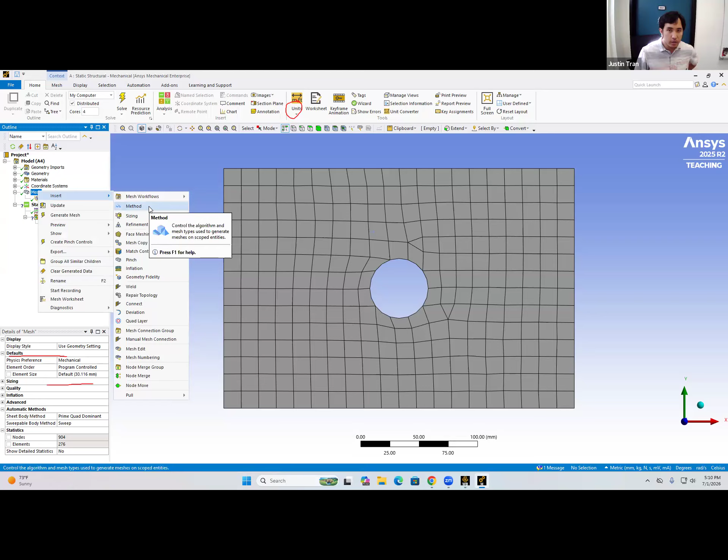So the next thing we're going to add here is a method object. The method object is going to allow us to change the shape of the elements as well as the order. Once again, let's right click on mesh, hit insert, and then go to method. This object allows us to specify shape and order. Let's go ahead and create that.

Once again, we need to specify the portion of the geometry. So let's go ahead and left click on our plate here.

And hit apply. Okay, so now we can go ahead and set the settings here. You can see that we can set the order and we can set the method here as well. The method is going to be our shape.

If we left click on this setting here, you can change the shape to either be quadrilateral dominant or triangles. Let's change it to triangles for a second and let's see what that looks like.

And then for the order, remember we have the option of either a linear element or quadratic element. Let's set quadratic just because there's no reason not to. Let's go ahead and see what our mesh looks like here with triangular elements. Let's go ahead and generate the mesh.

Okay, so you can see here that our mesh visually looks a lot different now. All the elements are now triangles, but the mesh size is about the same.

Okay, let me see if I can change this now. Okay, now I can change it. That was so weird. Okay, so let's see what it looks like with 10 millimeters.

Okay, so you can see, as we change the mesh sizing, as we change the shapes, our mesh changes accordingly. Now, for this activity, most of these changes are mostly just visual. They're not really going to change your output because this simulation is quite simple. But for more complicated cases, your mesh is going to make a big impact on your results. Any questions on this so far?

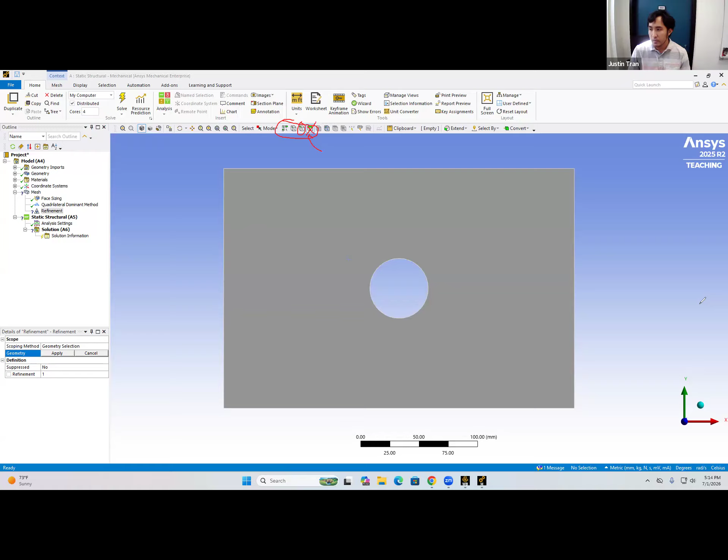We don't want that, so in order to select around the hole, we want to select this edge selector right here. Let's go ahead and left click on edge selector, and then let's go ahead and left click on the hole. Around there you should see the outline of the hole outlined in green. Go ahead and hit apply.

We'll go ahead and leave the refinement level to 1. We'll kind of discuss that a bit afterwards. But let's go ahead and regenerate our mesh and let's see what the mesh looks like with that refinement there.

Okay, so with the refinement, you can see that we're back to quadrilaterals, but in the region around the hole, you can see that we have slightly smaller elements here. That's going to help us when we are generating our solution results, because that's where the stress is going to concentrate in our simulation.

All right, so kind of right away, you see the application of our discussion on the mesh. We have mesh sizing, mesh shape, and mesh order.

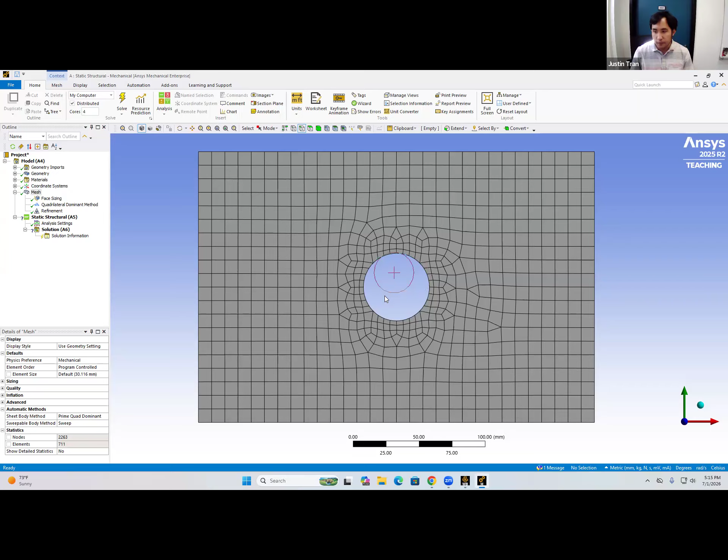Next thing we need to do is specify our boundary conditions. Let's go back to our specifications here. There are two boundary conditions that we need to apply. Remember, boundary conditions are any kind of external effects that are going to be affecting your simulation results. So on the left-hand side of our plate here, we're assuming that our plate is attached to a wall. So for all intents and purposes, that means this side of the plate is going to be fixed.

And then on the right-hand side, we are going to be applying a tensile force. But in fact, the tensile force is actually given in the units of pressure, so it's going to be a tensile pressure. So those are the two boundary conditions that we need to apply: first is going to be a fixed support, second is going to be a tensile pressure.

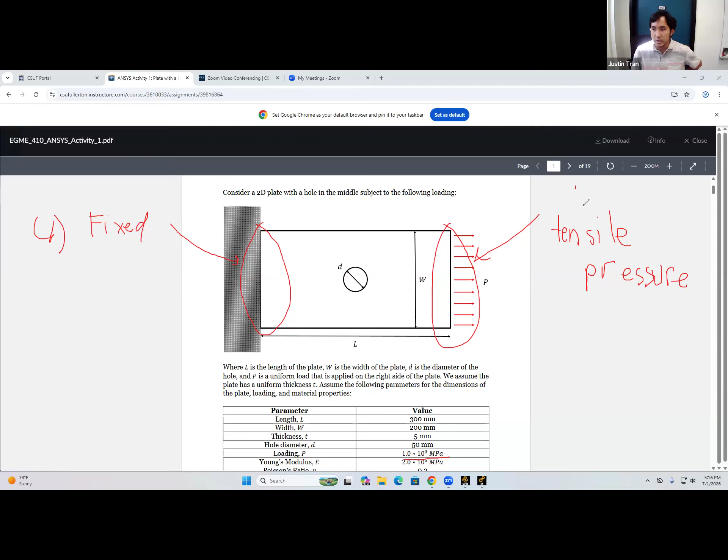All right, so just like we did with the mesh, we're going to specify those as separate objects in our ANSYS simulation here. We're going to right click on static structural A5, which is going to allow us to set boundary conditions. We're going to hit insert, and first we're going to insert our fixed support.

You can see here that these are all the types of boundary conditions that we can have. There are a lot of options here just because there's a lot of different types of boundary conditions out there in reality, but the one that we want for this particular job is a fixed support. Let's go ahead and left click on fixed support.

Now we need to specify the region of our geometry where we're going to apply the fixed support boundary condition. We want to specify the left-hand side of the plate to have that fixed support, so go ahead and left click on this edge right here. Just like we did with the hole, it should highlight green when you click it. Make sure only the left-hand side of the plate is highlighted green, nothing else. Go ahead and hit apply.

So now that left-hand side there is fixed, right? We basically fixed that part of the plate to a wall, so it's not going to move. The other portion here is we need to apply a tensile pressure on the other side.

Once again, we're going to right-click on static structural A5, go to insert, and go to our list of different boundary conditions. The type of boundary condition that we need to specify here is a pressure, which in this case we're not using strictly as a pressure. Pressure is typically compressive, but we're using it essentially as a distributed force. Go ahead and click on pressure.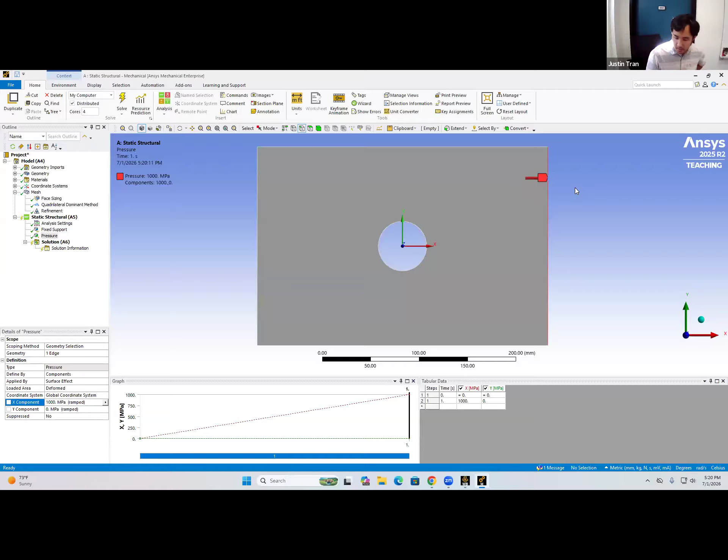So now that we've set our boundary conditions, the last step here is just to run the simulation. But before we run the simulation, we need to specify which outputs or which contours that we want to view. To do that, we're going to right click on solution A6 and go to insert.

These are all the types of outputs that we can specify. There's a lot of options here, so by default ANSYS doesn't show you everything, otherwise it would just be a little bit too overwhelming. But let's go ahead and specify the types of outputs that we want.

The first thing we always want to do is specify the total deformation. That's going to tell you how much your plate, or your geometry, is going to be deforming in terms of length units. So let's go ahead and click on total deformation.

Next, let's go ahead and specify the equivalent von Mises stress. Remember yesterday we defined what the von Mises stress is - it's basically a scalar representation of the total stress state in your plate. And then let's also view the equivalent elastic strain as well, just because we talked about strain yesterday.

So right click solution A6, go to insert, go to strain, and we left click on equivalent elastic strain. You should have 3 outputs selected there. I think in the PDF it also asks for maximum principal stress, but I think let's just focus on equivalent stress for now.

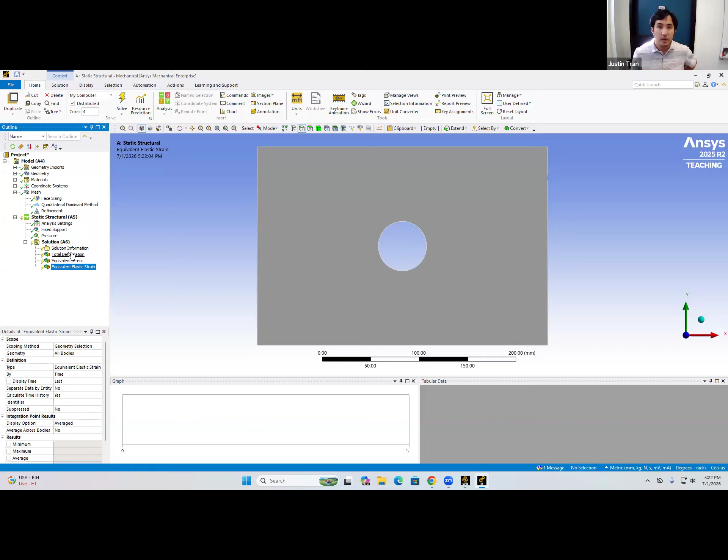With all those things specified, just double check, make sure you have your 2 boundary conditions, you're happy with your mesh, and you have all the outputs that you want. The last step to actually run the simulation is to click on this button here for solve. It should be under the home tab. Go ahead and click on solve.

It should only take maybe about 10 seconds to do. You can check the status of your simulation - there should be a progress bar in the bottom left. For some reason, it's taking a bit longer than usual.

You'll know everything is done when everything has this nice green check mark there. So if you left click on each of these results, you can kind of see what your results are going to look like. First we have the total deformation - this is going to tell you how much your plate is deforming in response to the boundary conditions.

The first thing we notice here is that the deformation on the left-hand side of the plate is 0 - you can see this portion of the plate is this deep blue color, and if we look at the color legend, that refers to 0 deformation. The maximum deformation is on the right side, which is where we're pulling from, which has a magnitude of 1.6847 millimeters.

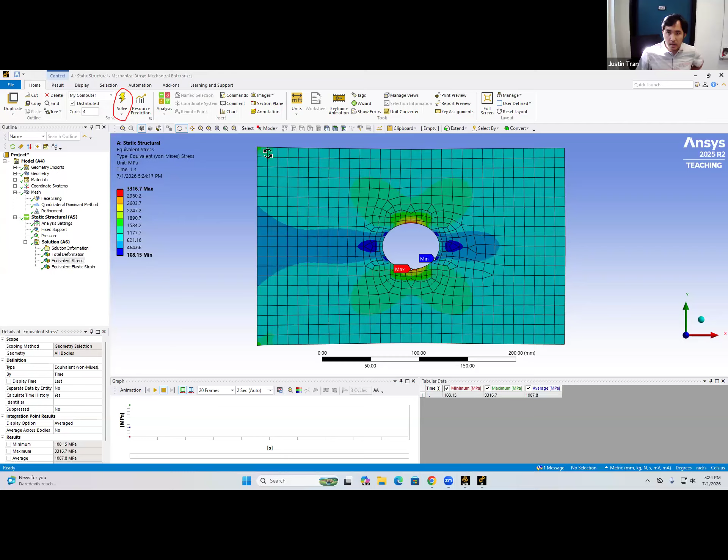Question from the chat: your values are slightly different than the ones being shown. Your values are going to be dependent on your mesh, since the mesh changes your solution a little bit. So if your values aren't exactly the same, it could be that your mesh settings are a bit different. Usually it's not a big deal. As long as the first 3 or 4 sig figs are about the same, you probably did everything right. If it's different in the 5th or 6th decimal, that's nothing to stress about.

Question, yes. For the deformation, I have a max deformation of 1.6847.

Okay, alright, so I'm going to go ahead and start making my rounds. Oh sorry, one more question from the chat.

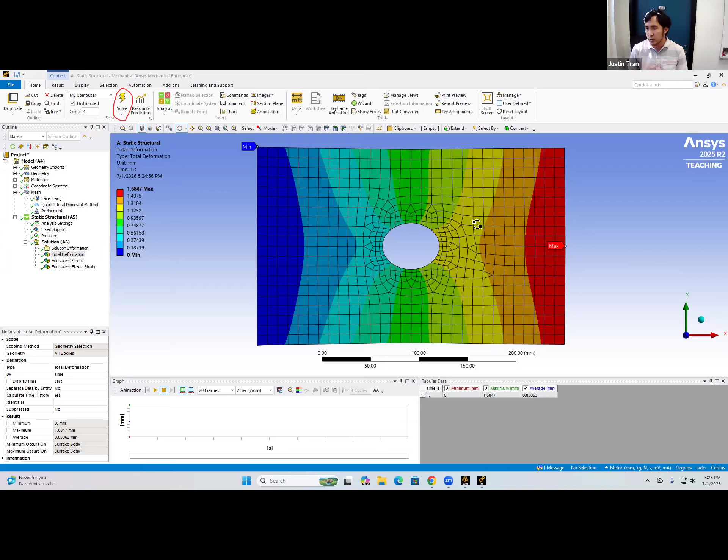Your deformation is 1.7? Yeah, I'd say that's very close. If you want to get a bit closer, you can fiddle around with the mesh settings a little bit. This mesh is still a bit coarse — I think I used 10 millimeters. So if you change this mesh size, we can kind of kill it with elements here.

So let's see what this looks like for a mesh size of 2. This might take a bit longer, but you can change the mesh size and see how it looks. As long as you're in that ballpark and your contours are about the same as mine, you're probably pretty close.

Okay, so I'm going to start making my rounds just to make sure everyone's caught up. But if you've reached this point, you can go ahead and start working on the rest of the activity.

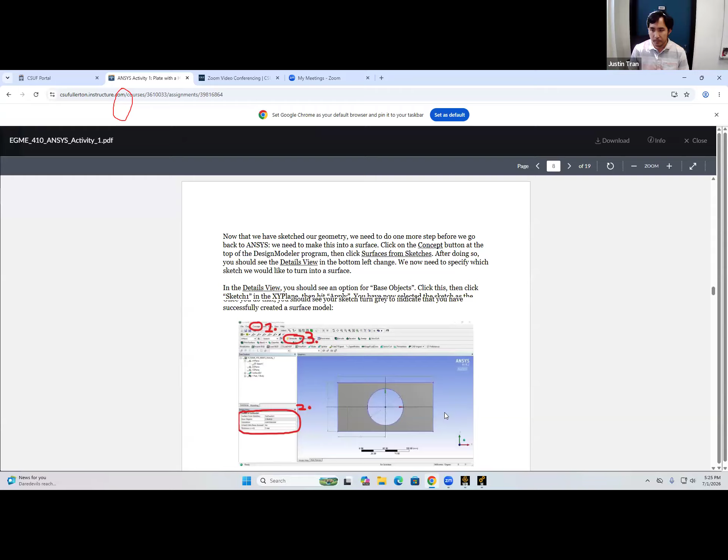If you scroll down to the bottom of the PDF, you can see there are short answer questions. There are different things for you to try, so you can change the loading — see what happens when you change the loading to 5,000 megapascal. You can change the size of the hole, change the mesh size, and try it with triangular elements as well.

And then there are short answer questions here at the bottom. You should be able to answer these short answer questions based on the lectures we did yesterday and today.